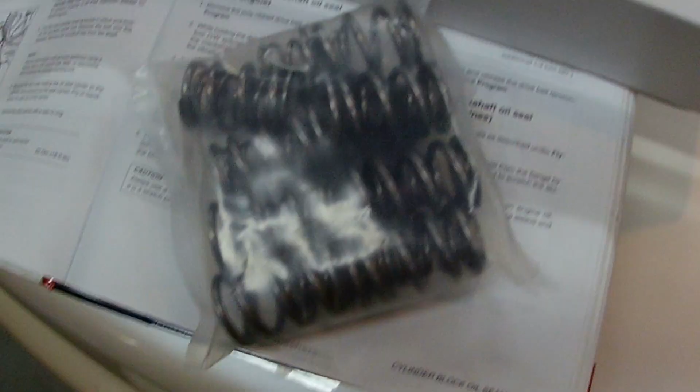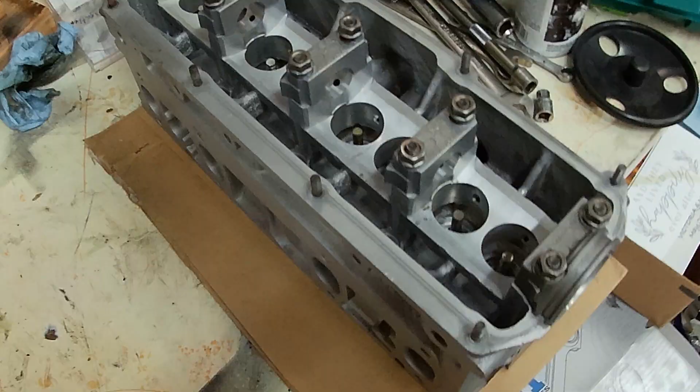Alright, terrific news. Techtonics Tuning has come through with a new camshaft and new valve spring kit, and it's time. So now we're going to go ahead and put this cylinder head together, pop the camshaft in, get the valve springs on, not in that order, and it'll be good to go.

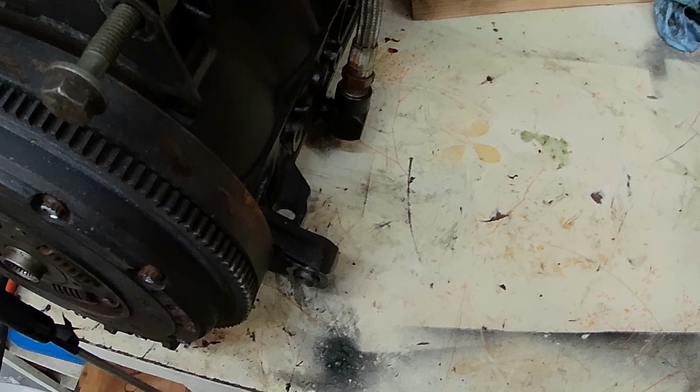In the meantime, I've done a bunch of reassembly here. As you saw before, we did the pistons and the rings, they're all in, the head studs are hand tight into the block, ready to go. Clutch and flywheel are back on, oil pan's back on and torqued. We're getting close to firing this sucker up. Can't wait. Stay tuned. Let's build a head.

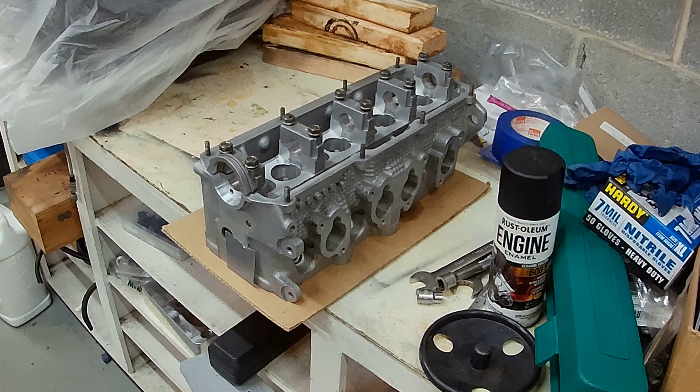First thing we will need is the seats for these dual springs. Now, something I learned, and the guys at Techtonics Tuning told me this, is that the valve spring size in an OBD2 head is different than in an OBD1 head. The OD of the outer spring is actually smaller on an OBD2 cylinder head, which is why this actually fits. And I wish I hadn't dropped that in there, because I can't get it back out. Son of a bitch.

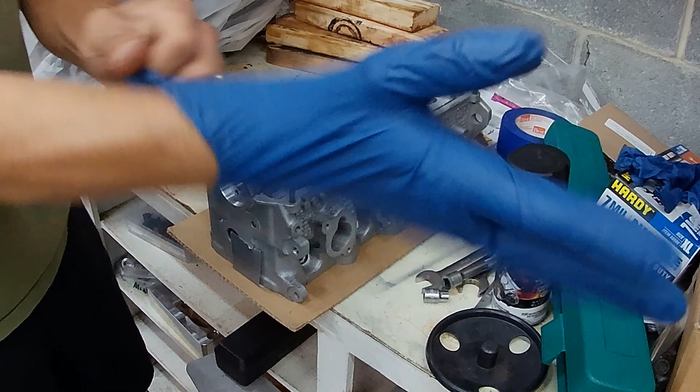It's okay, perfect. So first thing we're going to do is drop a seat into each one of these. Don't be difficult, come on now. Oh, this is going to suck. This is already turning out to be just so much fun. I should probably put some gloves on to preserve the cleanliness of my hands, which I never do, but I'm going to because I'm going to be eating lunch soon, so I don't want to make a mess.

Spring. Well, hopefully they'll sit down nice and good. Spring, spring, spring, put it nice on those seats. Okay, springs are all dropped in.

Easy peasy. Next order of business, we need to reuse the retainers, the top retainers, and the keepers.

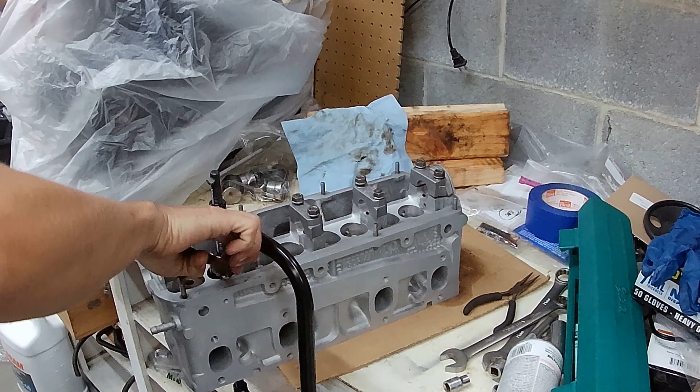And I believe, folks, we are in good shape here. Great. Now, stand this head up.

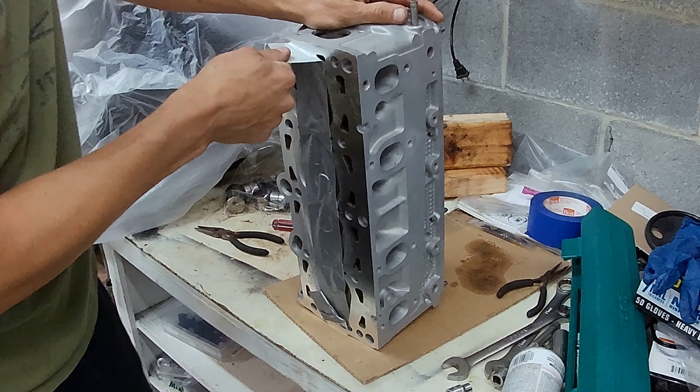We'll take our blocks of wood. We're going to set them down because when we put this camshaft in, it will inevitably force a couple valves open. The nuts down here out of the way, and the caps will go right, more or less right in front of

Oh boy, that one's stuck. Since we have a new camshaft, which for what our project is, this will be good. This is the 266 camshaft, aka the 270, and we're going to use that for our ABA turbo here. Okay, there we are, cool.

One item you're going to absolutely need is the Woodruff key. So hopefully you saved your stock one, because you will need it, and that's going to take a little tappy tap to get put in here. Boom, nothing. So that was easy. The SPA cam that I had before did not do that. I could not fit that key to save my life, and that's a problem.

Before we do that, you're going to want to take your lifters. Always replace your lifters. Lifters are in. Now, assembly lube on the cam journals and on the cam caps, and it'll be time to put this camshaft in. Cam caps are prepped, journals are prepped, lifter tops are prepped.

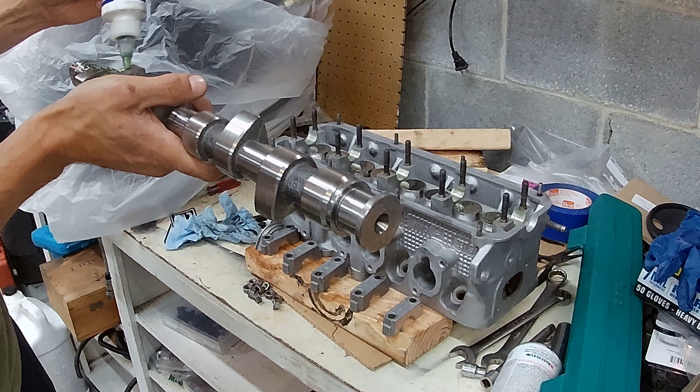Next item we're going to take care of will be the races and the lobes. We're going to hit everything with some goop because it just makes sense to do so. We're going to just goop on one part of it and then we'll wipe it on. It's just a lot easier to do when you don't have a container in your hand, so it should all go pretty smooth. Man, this stuff is sticky. And that's kind of the point too, it keeps everything in place. So wipe that on, make sure we get the whole lobe. Journal, lobe, good.

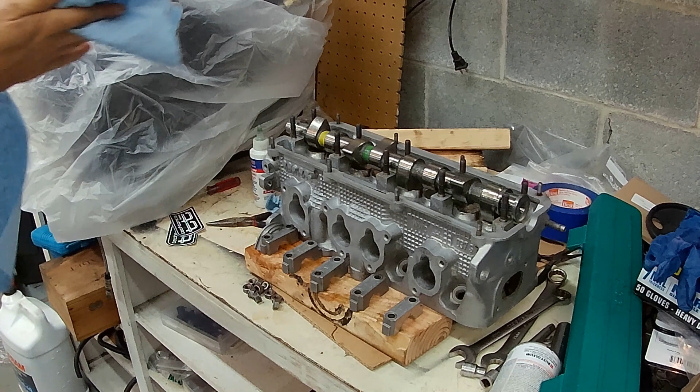And you will get goopy in the process of doing this, so truthfully, don't worry about it. Just grab it up, smear this crap on here. Once you're all smeared up and good to go, you can go ahead and gently set your cam into place. Now you're going to want to clean your hands off because you're all covered in garbage, because you didn't put gloves on. Ow! God damn! Also, in case you were curious, if you ever have a cut, brake clean will find it for you quickly. Just a top tip. Also, brake cleaner is not hand cleaner, but it also works really good. So do what you want.

Now, let's try and get this camshaft set in here in a way to put the least amount of pressure on things.

There we go. Cool. Everything turns over okay, so that's good. Alright, everything's smooth.

Now, flip over to our torque wrench. We're going to set it to 15 foot-pounds. Since everything is already pretty good, we're just going to start from the middle and work our way out. So boom, boom, boom, boom, boom.

And the cam caps. The reason I'm marking both is just to make sure that if we look at this in the future, nothing has backed off.

Motor oil on the outer edge of the seal and a little motor oil on the inner edge of the seal helps it slip in, and life will be pretty good. Then all we need to do is carefully seat it, just to make sure that seal is fully seated.

Camshaft bolt goes in. Alright everybody, time to do this. We're going to go ahead and mate the cylinder head we just assembled to the block.

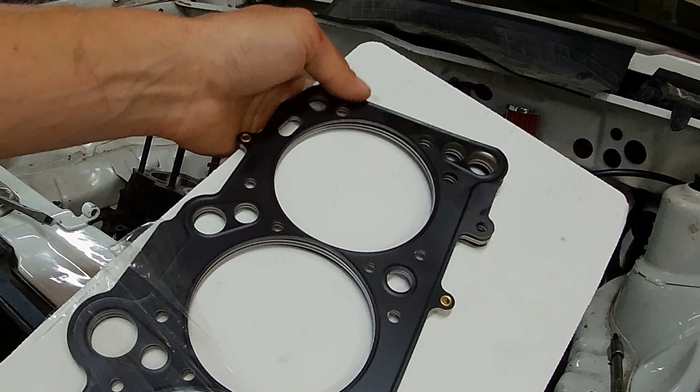We have our covering bag. We're going to go ahead and take a rag, give everything a quick wipe, make sure that it's clean. Put on our new Cometic head gasket, so no head spacer here, it's already got the layers that it needs. So that is easy peasy.

Now we need to go get the cylinder head. Alright, I'm going to... go home, little buddy.

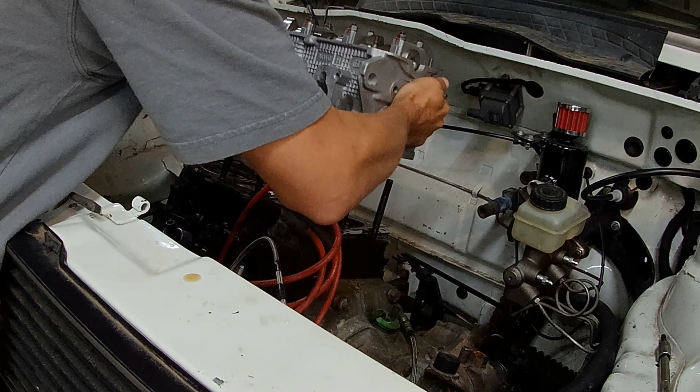Ta-da, we're done. Engine will run. Just kidding. Don't forget when you do this, follow the instructions. Use the ARP fastener assembly lubricant on the threads, on the washers, on the bottom of the nut, everything. So that's what we are going to do first and foremost before we do anything else.

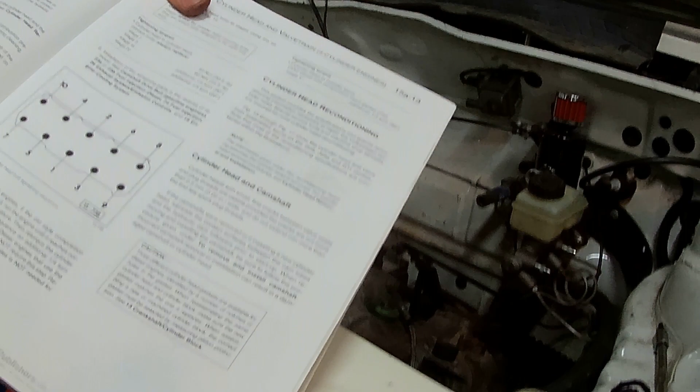So we're going to go ahead and lube our nuts. What we're going to want to do is consult your Bentley manual if you're not sure. We're going to start in the middle and work our way out from there, so this should be pretty straightforward. We're going 80 foot-pounds in 3 equal steps.

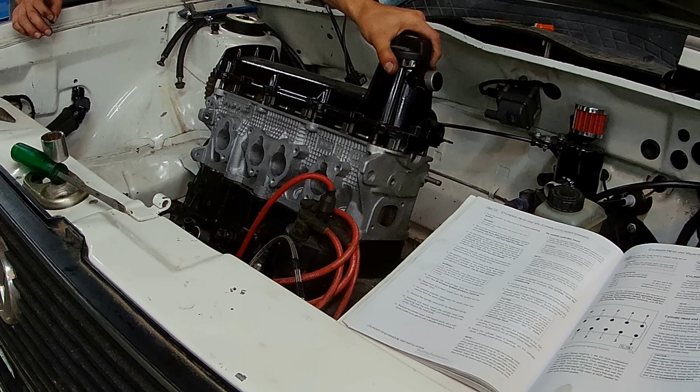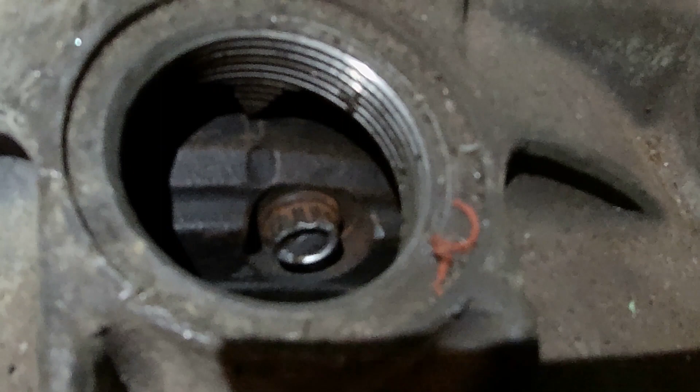I guess the next item, so we can see where TDC is on the cam. Okay, so we've checked, let's see if I can show you this. You've checked our mark, there's the arrow and the OT. So that's top dead center on the crank.

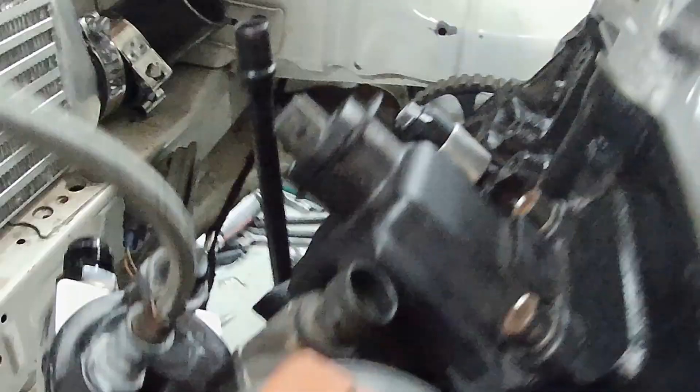We are TDC on the cam, and we are TDC on the dizzy, because you'll see there's that little notch there. And if you lift up the shield, there's a little dink taken out of the dizzy housing. So the motor is at top dead center.

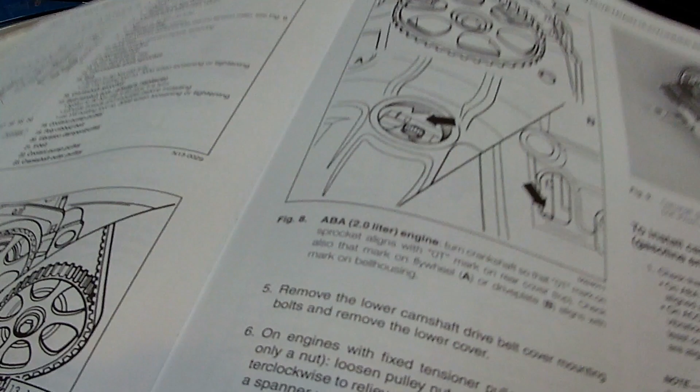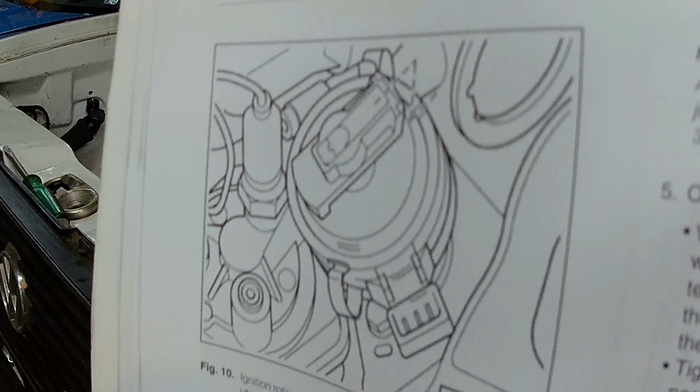At this point we should be able to put our belt on and then tension it. Just to confirm what I was saying, you're going to try to line the arrow up with the 0, the cam up with the OT mark, and as I stated, the distributor has a notch. As you can see, we're all good.

Let's see how our marks look. We lined up? Sure looks like it to me. Still lined up? Yup. And yup, looking good. Alright, now we'll be able to tighten the tensioner.

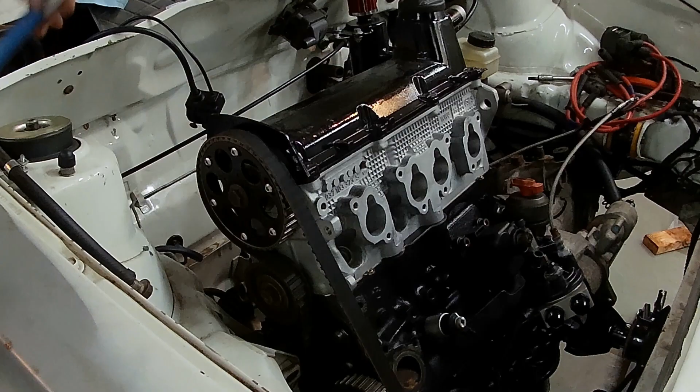For that, you're going to want to use one of these guys. We'll see how that feels. We could probably go a little bit tighter. Just a touch. Timing belt has been tightened.

Now we should be able to crank everything over with a wrench. Since there's no plugs in it, it should be pretty easy to spin, and everything should spin pretty nicely.

Now we're going to go ahead and look for our timing mark, which is coming up pretty soon. Boom, boom. What do you think, guys? Boom, right on the money.

This motor's timed. Alright, and that'll be the end of today's video. I would say we got a lot done today. Got the motor in, got everything mated together, timed.

Yeah, so now it's time for me to basically put the whole thing together and forget to film it. So hopefully you guys will tune in for that, where I show you everything that I did, but didn't show you how I did it, like most of this project has been. So I hope you learned something today.